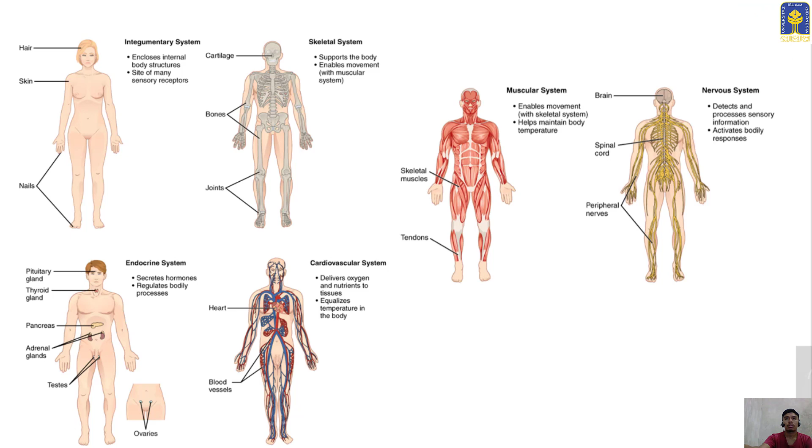The successful design of any structure requires satisfactory answers to the following questions. First, is the structure strong enough? And then, is the structure stiff enough? Although this may be stating the obvious, the answer may not be readily obtainable. Furthermore, before attempting to answer these questions, two further questions must be answered. These are: what is the structure, and what are the loads?

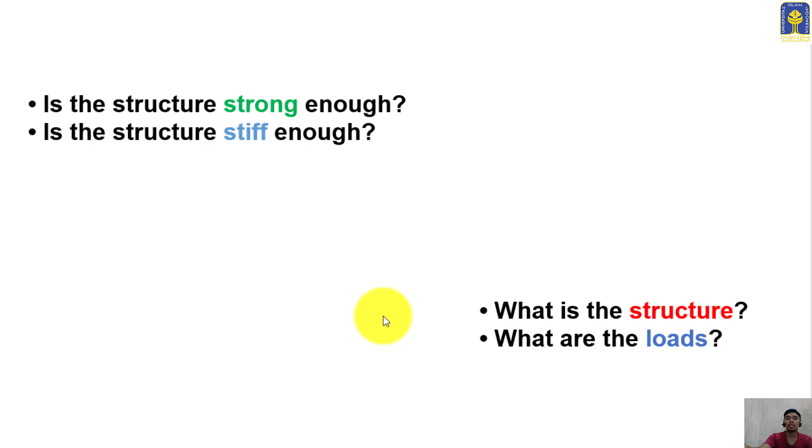The most common answer to the question what is an engineering structure would be along the line of something that carries loads. Well, there is truth in this. It needs to be extended to the concept of carrying loads from one place to another, that is, transferring loads. A simple example illustrates this. If people want to cross a stream, then a plank could be used as a bridge. When people are on the bridge, their weight or the loads are transferred from a point over the water, which cannot directly support them, to points on the banks which can.

The purpose of the plank is to transfer the point load to the points of support. The plank does this by acting as a structure. The diagram can be redrawn showing the applied loads. Here the applied load is the people. And then the structure, the plank. And then the points of load support are the banks of the stream. It is more usual to call the load supports reactions. This load transferring function is the main purpose of all structures, whether it is a chair or a railway bridge.

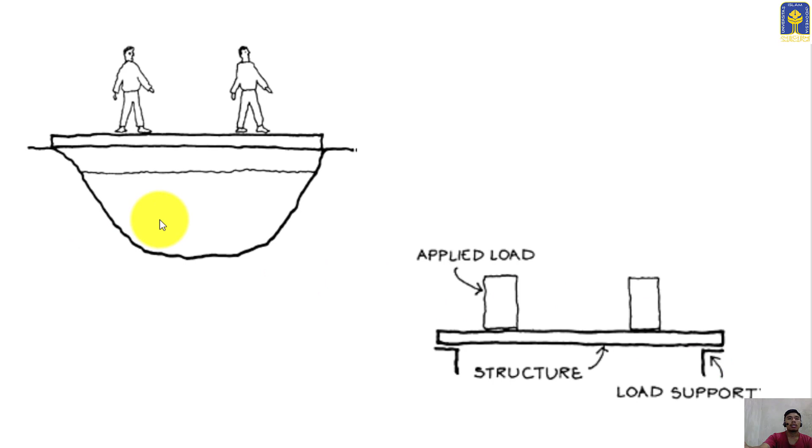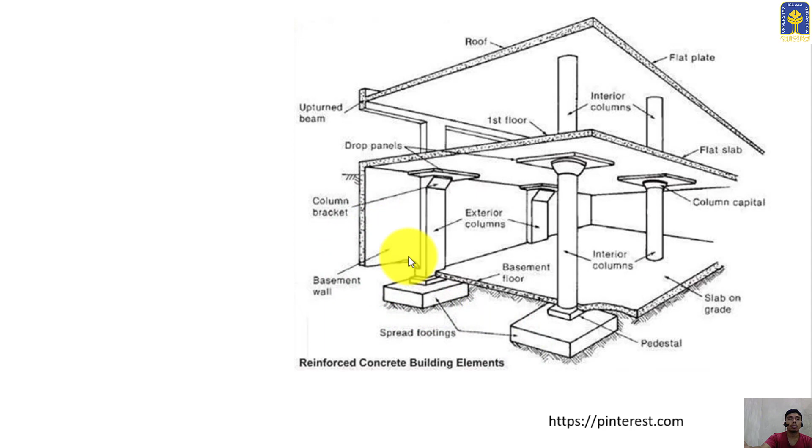Okay, this is an example of a description of the existing structures in a building. When it comes to structures, think of the bones in our bodies. If there are no bones, our bodies cannot stand. Same with the building. The building needs, we can say, bones. They have columns and flat plates, and then column capital, slab on grade, pedestal, spread footing, basement wall if they have a basement, and then stairs, column, foundation wall, beams, and then wall footing. If they have a wall, they have to have a wall footing.

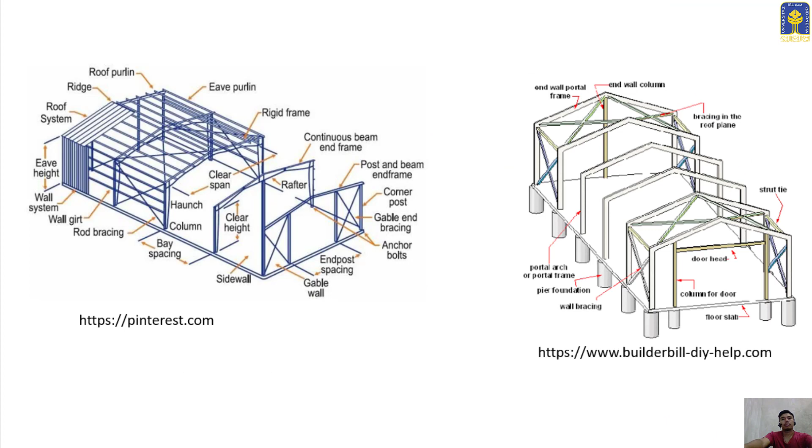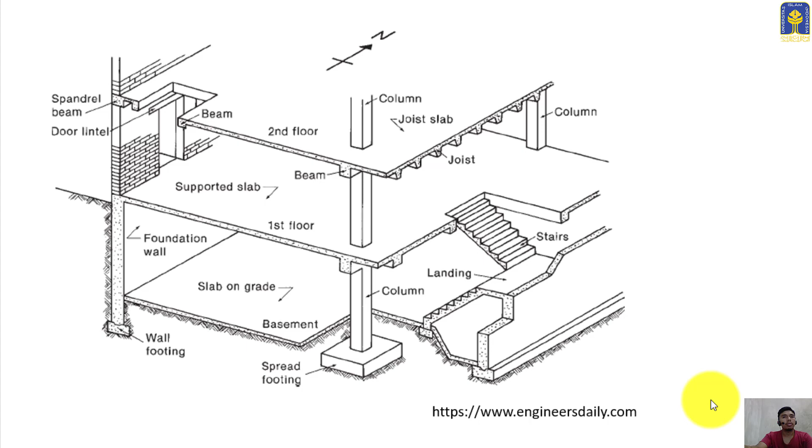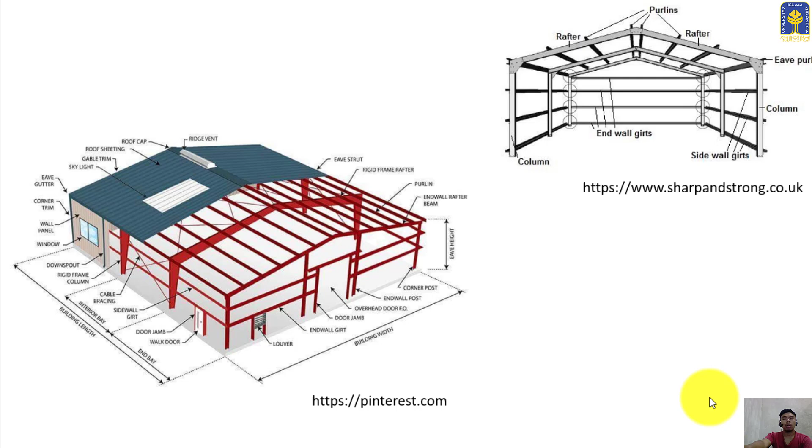Here is an example of a steel building. They have a rafter, and then column, wall bracing, pier foundation, portal arch, roof system. This is the other example. There is purlin, end wall girts, side wall girts, etc. Many elements of the building structures. It depends on what building we talk about. Each building will have different structural elements, but in general, there are columns, beams, floor slabs, and foundations.